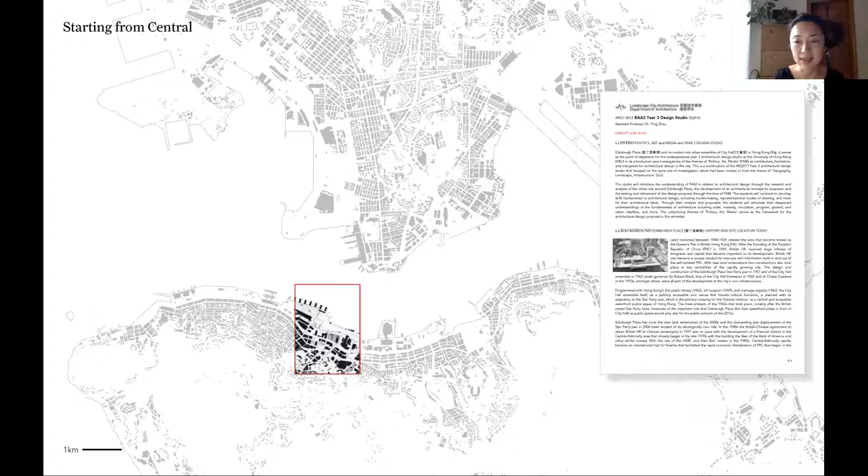What I share today began as a series of architectural design studios at Hong Kong U since 2017. We began by looking at the City Hall as an ensemble—starting by taking apart and looking very closely at this place we all know well. This is, of course, what we have the luxury to do in the academy.

In analyzing the history of each of these buildings, we see that the rising skyline very much manifests the history of Hong Kong itself. The changing materialities of the facades, from the masonry structures to the taut glass towers that rise, reveal the economic transitions that have taken place in our city.

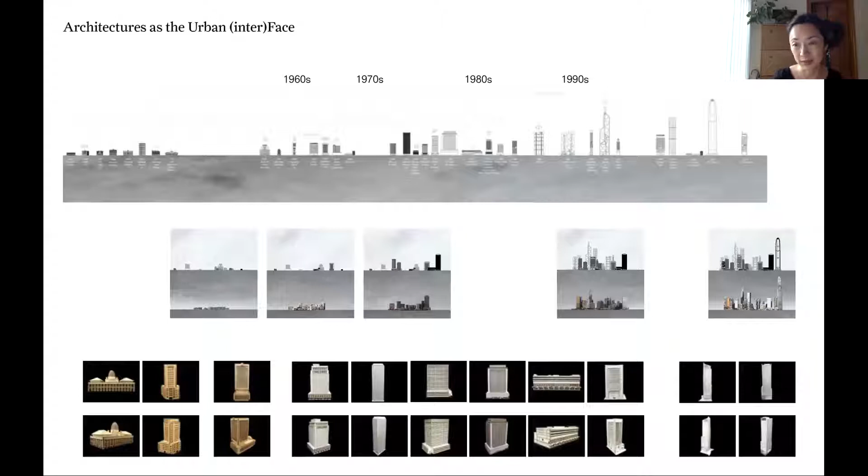They tell the story of the old trade houses and the new global capital that makes this place what it is. What also makes this place special is that it's located along Victoria Harbour, giving it an urban face that is extremely clearly visible—something that makes it quite different from other cities that don't have the luxury of such a harbor.

We can see from the plan that all of this was carefully composed and deliberate. There's an axis leading from the HSBC tower aligned to the Star Ferry—I don't know if you can see my mouse—and there are other alignments designed within this ensemble, for example the alignment to the cenotaph from the City Hall, and the public spaces.

The Edinburgh Place—this was the former Queen's Pier, and this was the old Star Ferry terminal. This is the parking garage that still stands there, and the GPO that faces the waterfront. A lot of these boats actually landed right under the basement of the GPO, delivering the mail that makes all of Central buzz still today.

These public spaces, of course, have been changing, but the public spaces are actually even more highlighted by the functions that take place within them.

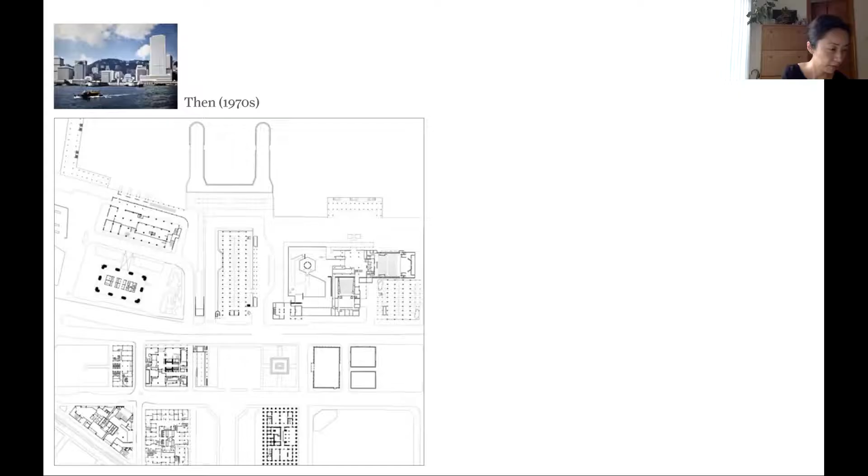We can see here the library, the concert halls, the museum, the ferry pier, the post office—these public functions, including schools and railways, all came at the same moment in history during the industrial age under modernity. Our predecessors at that moment thought these civic functions and the spaces that went along with them not only make us better citizens and a better society, but were also possible because we all live together in the city. Here you can see again the very urban and civic face of Hong Kong from Victoria Harbour.

We know that this face would very quickly change around the mid-2000s with the land reclamations that you can see took place in the lower right of this image.

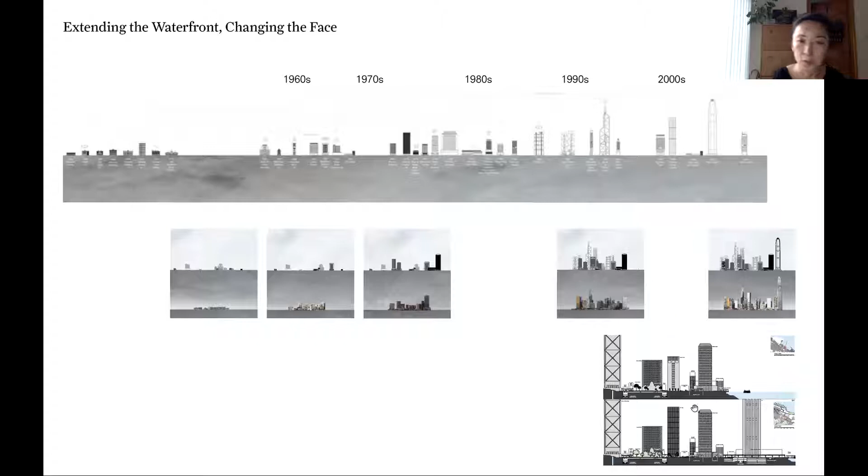The decision to ensure Hong Kong's economic success had already been made in the 1990s as a result of many things. Infrastructure was, and is, always seen as strategic to development and therefore a priority. We know, for example, with West Kowloon, that the conceptions for the landfilled hectares—all the blue infills—only took place after Kowloon Station itself opened in the heart of West Kowloon.

Similarly, when we come back to our city center, Central, the highways are again prioritized. The consequences result not only in the dismantling of the civic face we just looked at, but in the indeliberateness of the resultant spaces, grouped around roads rather than plazas. You can see as architects the shift that took place between here and here on the right—the plazas are no longer designed as plazas, but are left over from the roads created around them.

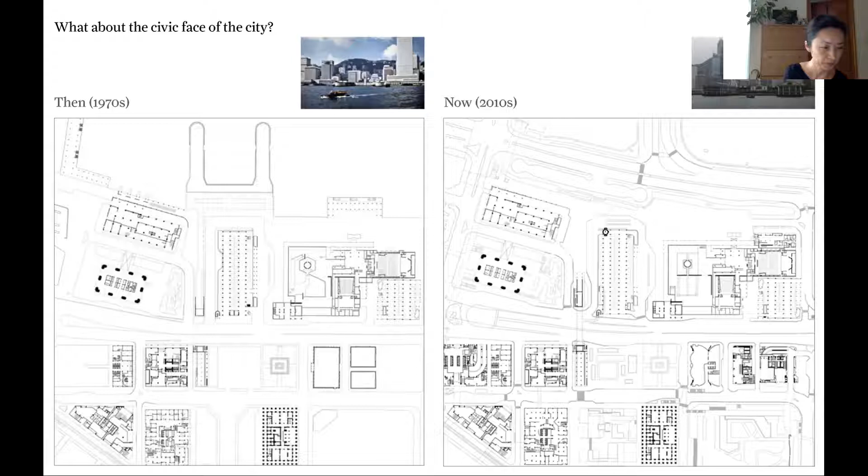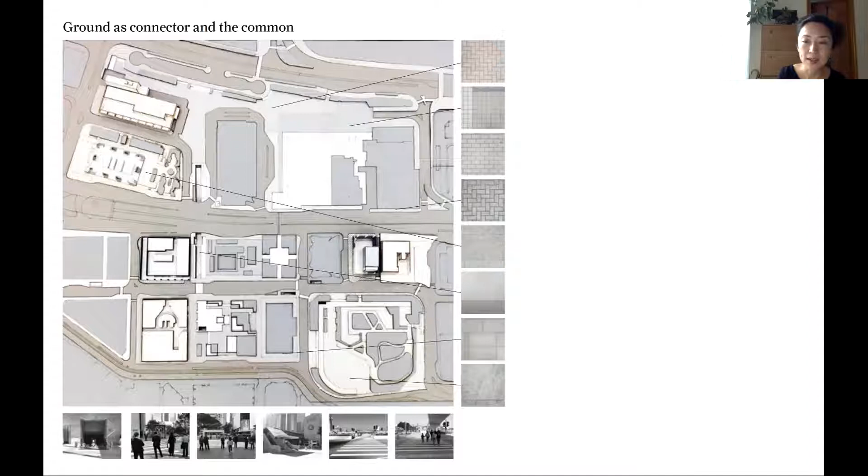It was also important to look at the study of the ground, because ground is not only for cars, but for people. Cars, romanticized since the post-war era of the 1950s, have since been regarded as mistakes scarring the city, already in the West. This shows us that Connaught Road, which separates City Hall to the north and Statue Square to the south, is also a very large rupture and disconnect.

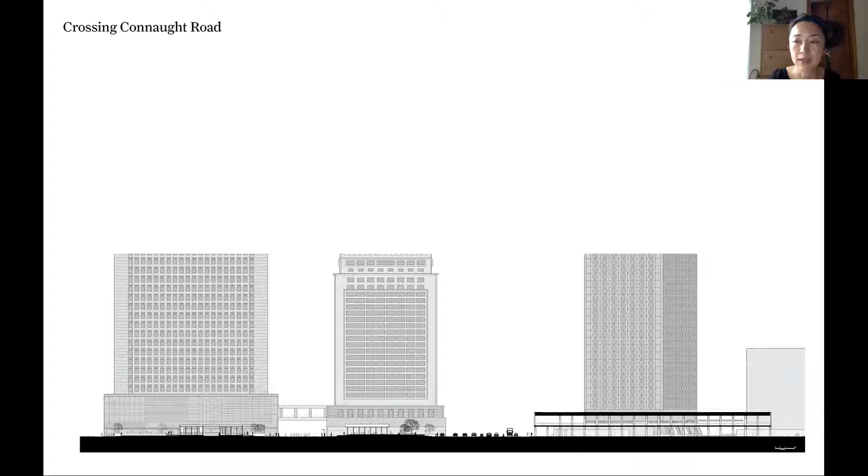So in order to cross Connaught Road from Statue Square, which is up here, to Star Ferry, you can see there was a tunnel already planned there. This is, of course, a larger set of relationships very visible in Central, in relation to the extensive MTR tunnel system that was also put in place in the early 80s.

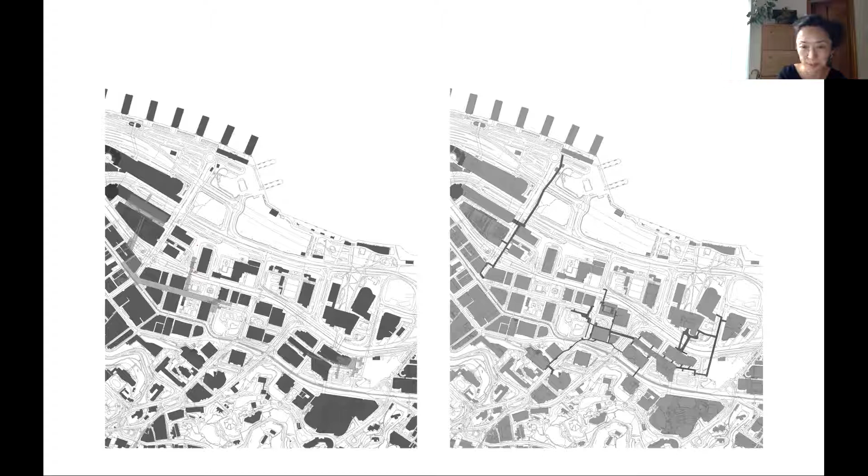Another glimpse—to go to the City Gallery, on the side of City Hall from the eastern end, instead of taking the tunnel, you can also take this bridge that used to go through Hutchison House, which is this building here. But of course, Hutchison House, which was standing only two years ago, is no longer with us either.

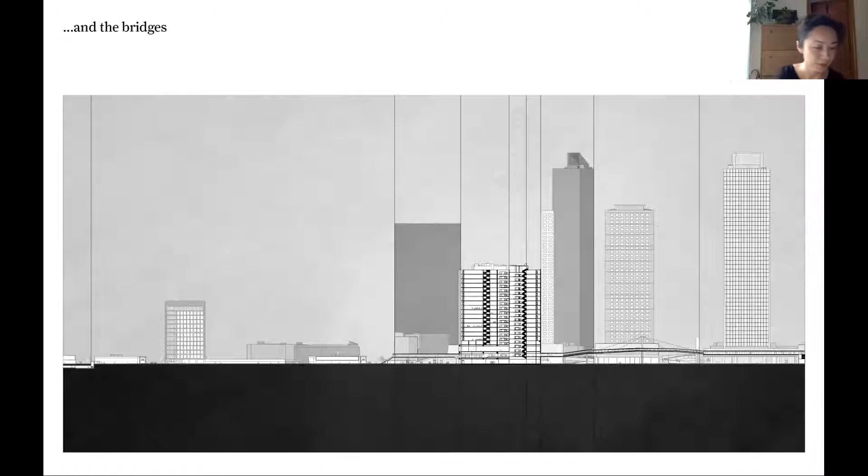Another very real view: these transit spaces are actually, on weekends, also places for rest and gatherings in a city where space is of course very scarce. These places that are public, that are shared, that are in a way commons, are in addition to the more formally designed plazas and parks that already take place.

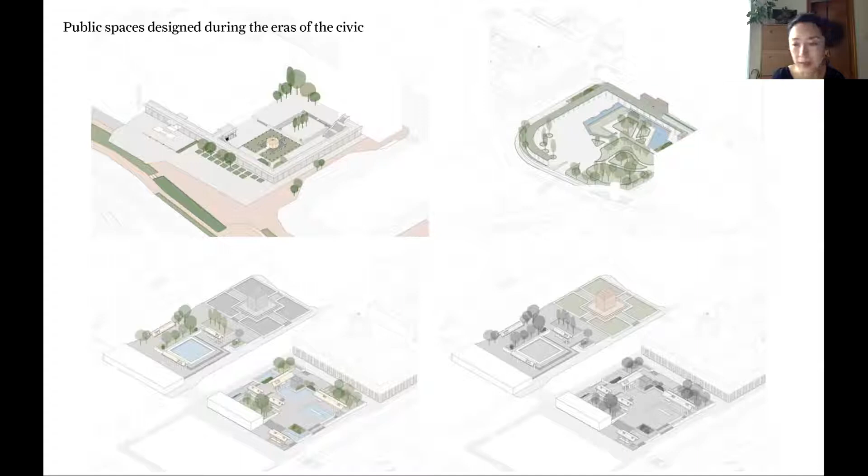So we have the set of present conditions we are in today. It is itself very much in an interim state. And with the students, we were asking: what are the plans for this byproduct of infrastructural priorities? What is the future?

We began to look at the future and at the guidelines for designing this future. It was, for example, very obvious that the importance of parking compels or necessitates the demolition of the GPO. You can see a student's analysis of what would come if it were to be realized, and why it's much easier to just tear down buildings in order to make this happen.

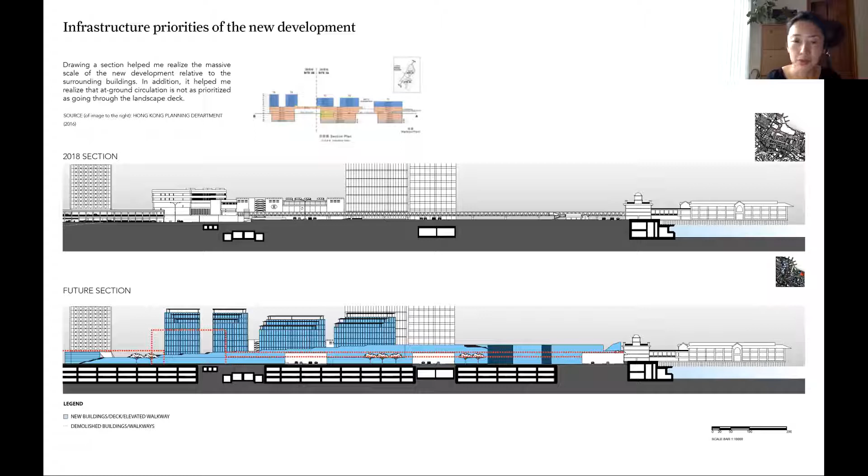What kind of urban face? Of course, we're really talking about the face of Hong Kong, what the future shows to the world. The future urban face would be designed in consideration of the forms, massing, materialities, and the functions of this place.

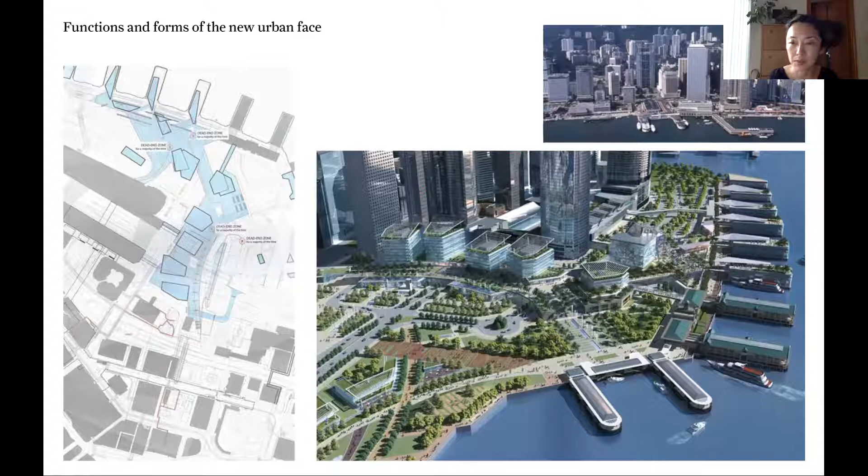We saw earlier that capital manifests itself in the taut, shiny facades that take place. So is this what kind of face we would like to present to the world? We have, at least in the academy, the luxury of dreaming a bit of other possible futures, to think that this is not the only possible future that needs to take place here.

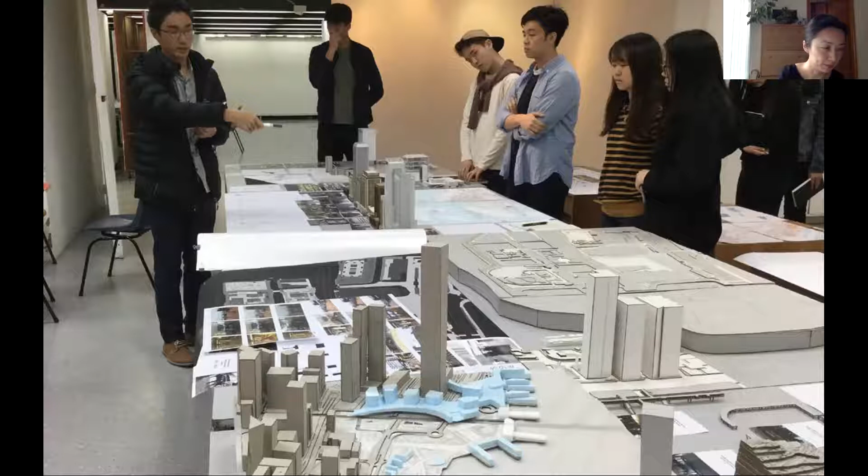We tried very much in the two studios, looking closely at the site to break down their elements. It was interesting when we were discussing and making models at various scales that one of the students took this blue foam, which represented one version of the future according to the planning guidelines, and said, did they not make a model of this? Did they not look at this? Because if you looked at this huge blue foam mass and put it on the existing structures, we'll see how massive it is.

We know there's an adage from a lot of planning departments, especially from the developing part of the world, that bigger is better. But that question should be tabled again in relation to the future of this place.

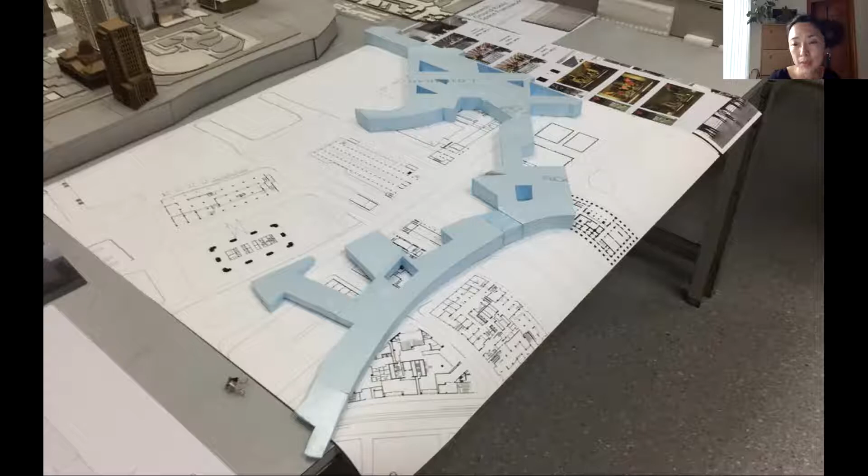The other thing we can see is that the intent for this blue massing is, of course, for a lot of commercial programs rather than public programs. So you can see from this outsized scale, it is much larger than, for example, the existing City Hall, not to mention the GPO itself.

So the urban face of Hong Kong, the City Hall building and the GPO, is an ensemble, the realities of the infrastructure and developmental priorities, and within all of this, is the civic still possible here?

If you had visited our exhibition in 2018 summer at the PMQ open space, you would have seen that some of the students did design with much care and precision alternative futures. And within this, a version of reuse adaptation of the GPO was there amongst the other ideas. So I hope some of those students can also keep on going and contribute to this open call. That would be really wonderful.

So I end on a few words that I think is very important in thinking about this place, this notion of a public. Public, and not in the sense that the land is owned by the state and done with it with certain kinds of decision making, but the sense that there is something that is shared by all of us, this notion, this common, in relation to society, especially in thinking the possible functions that could come into this new future.

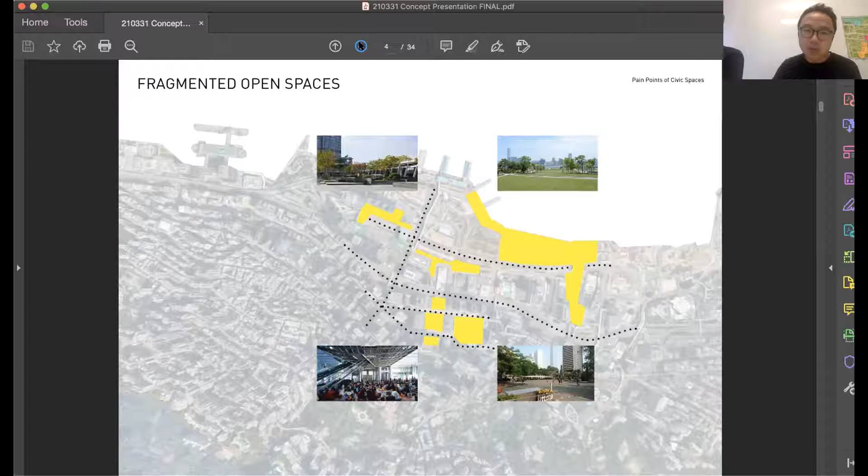And then the other is what is civic program, and what has happened to civic programs. And I think what Ying was also echoing, there was a public phase back in the 1960s when City Hall was built, and there was a very deliberate intent of having that at a very prominent space in the city.

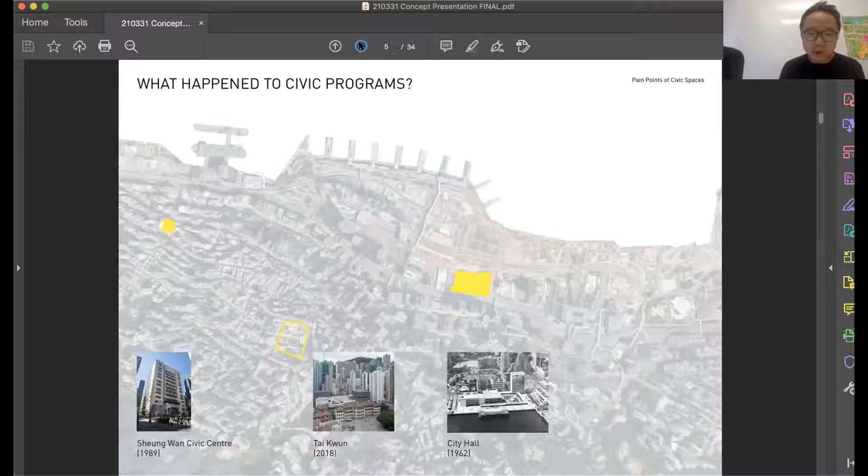What we've observed down the road is there's the Sheung Wan Civic Centre, which is a very typical kind of vertical building. Then obviously we have what Katie was mentioning, a trio of Tai Kwun and Central Market and PMQ in succession. And I think those are really encouraging, but there's still a larger question of what is civic programs and what is civic space for Central.

And obviously, right now around the site, it's quite undefined. There's lots of public space, but it's like question mark, question mark, question mark. How do you get to it? What is going on there? What's happening around there? A lot of undefined spaces.

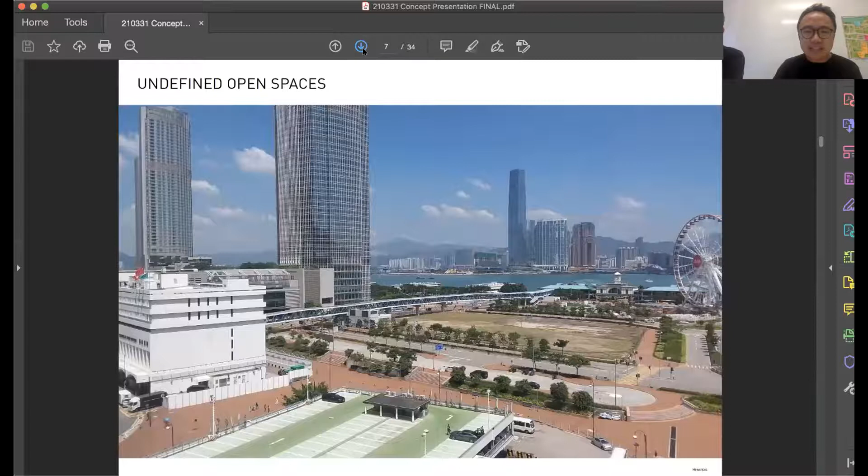So, typical to a lot of our projects, what we look at is there's a couple of issues that we identify: fragmented open spaces, lack of civic programs, informal activities, and undefined open spaces. But these are also all opportunities that we can base our design on.

How do we facilitate integration of open spaces for different types of activities? How can we consult different stakeholders, bring them into the fold to look at what civic programming needs are? Can we build support spaces for some of these informal activities? Can we transform some of these open spaces and streetscapes into something that is for the many?

And then, how do we provide open spaces with varieties of spatial definitions, so we can create that civic face, that civic presence, that we think is still lacking in the neighborhood of Central, a very important neighborhood.

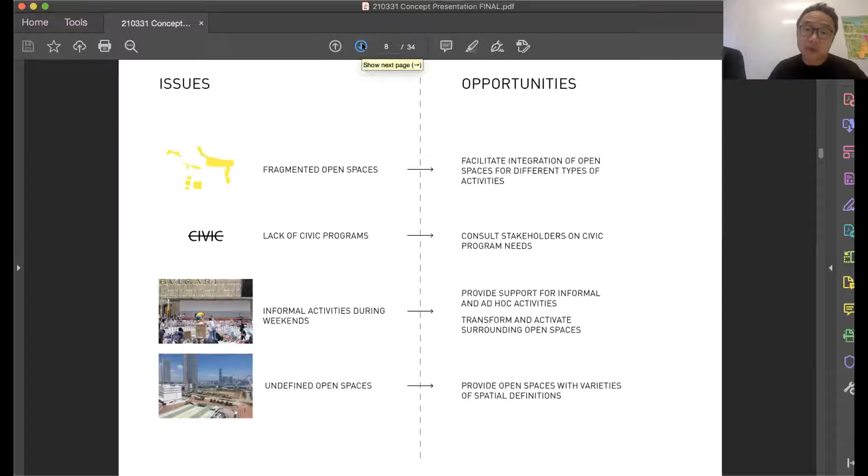So how might we encourage informal uses and cultivate a diversity of civic programming with visibility and easy accessibility? There's a lot of public spaces in Hong Kong that are very inaccessible, for example on top of podiums where there's no elevator to access. How do we create a melting pot of new civic spaces that can allow citizens of different needs and abilities to create, meet, mingle, and play?

How can we establish an identity for public space that respects culture and heritage, and also, most importantly, continues reappropriation according to the needs of community? How can a space be flexible and available to accommodate these needs?

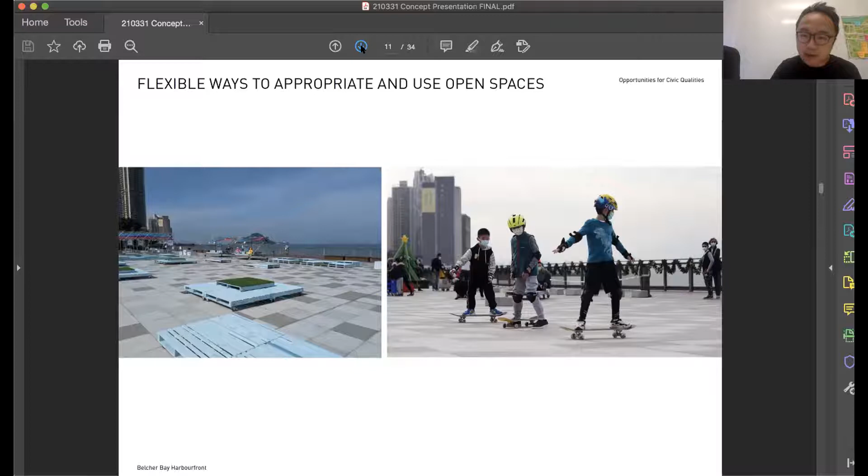This is an example of Belcher Bay Harbourfront, where there's a very experimental approach of creating extremely flexible and experimental play with different kinds of audience. Obviously Tuen Mun Park, which is quoted so many times around inclusive play. But also, how do we bring in technology and different kinds of interaction into the fold?

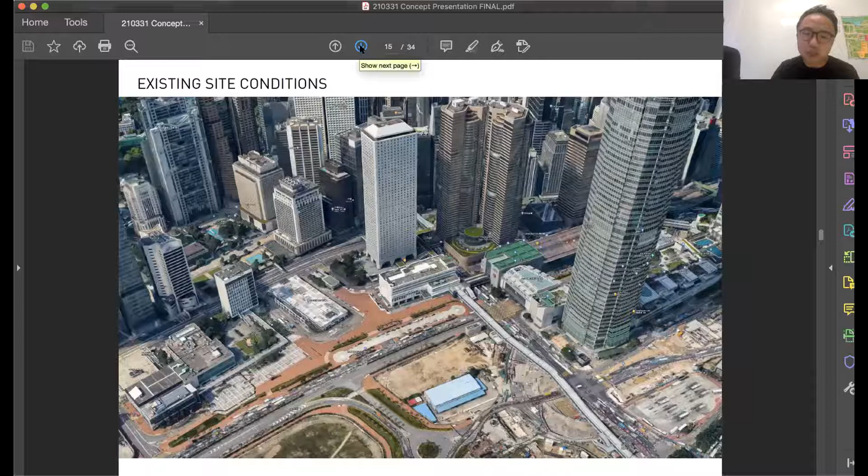So with our planning strategy, we know the site is challenging on many fronts, with a lot of different roadways and a lot of activities that need to happen on the first floor instead of the ground floor. So the plane condition needs to be very well defined. How do we actually connect while the site is quite disconnected?

So our initial strategy has six parts. One is, echoing the planning principles, to strengthen the access to the waterfront. We want to push this massing to one side to really create room for the civic landscape.

And then responding to the heritage component, how do we use the back of the site to address GPO, City Hall, and that whole complex at the back? How do we create leisure for the public, and how do we create such a unique site that creates a viewing experience and an amenity for the public in the front?

Obviously the adaptive reuse of the heritage, really looking at GPO as a very integral component. The Star Ferry clock tower, which I assume they will bring back somehow - how do we respect that? And obviously the extension of the waterfront.

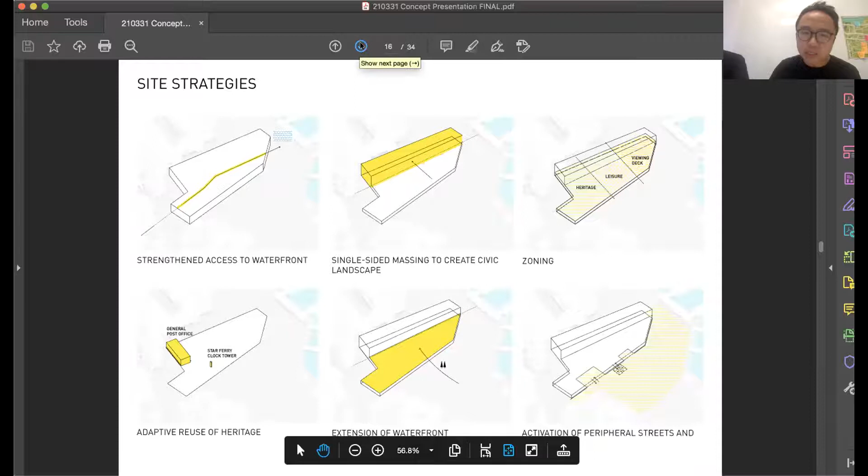How do we create a plane that can really interact and relate to the waterfront? And lastly, how do we look at the periphery? How do we activate the streetscapes on the edge to allow for these informal civic ways of activating the public space to happen?

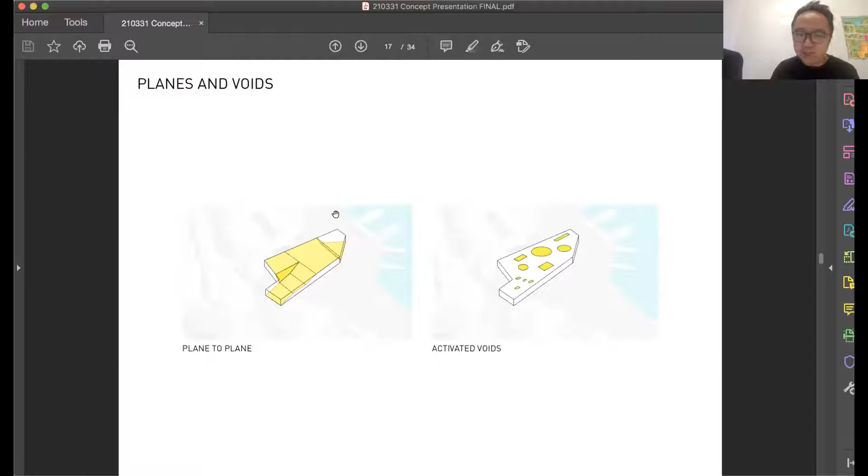So we have two strategies. One is kind of a plane idea, and one is kind of a void idea. And Rick is going to walk you through that.

Right, so we have prepared two ideas as of now. The first idea is what we call Slope Commons. What we envision here is actually a series of wedges - large urban forms that aim to bring people from multiple levels, namely from the south side, from the basement, the connection with the MTR, up to the podium level, and further up to the higher massing towards the west side, closer to IFC.

Hong Kong's development a lot of times falls victim to development pressure, and it's never fully realized to the architectural potential that it could have.

In here, we are interested in exploring the idea of a larger urban form. The wedges sort of underline the entire development of Central, creating a continuity that is immediately iconic. It creates an unmistakable landmark at this very precious Site 3 of Central.

The other idea that is very important to us is that the Site 3 development is not entirely contained within the boundary. It exerts its influences across to the lots on the north, and also to the east side as well.

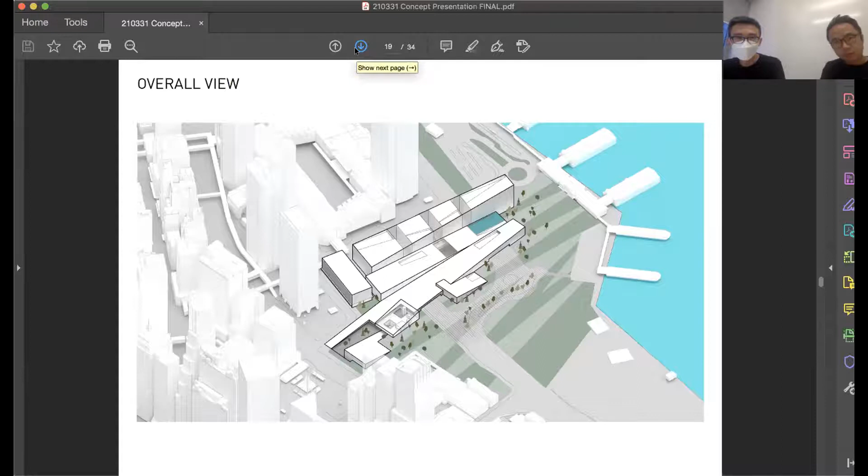Here you can see how we envision the programming of these wedges. Like what Eric mentioned before, we think the massing closer to the south side has a better relationship with City Gallery and the GPO, so the programming there will probably be more civic oriented.

With this particular scheme, the slopes on top of these wedges are all meant to be accessible. This opens up a lot more opportunities for urban experiences that have a very good relationship with the harbour views.

We never forget about the symbiotic relationship between commerce and civic. Going forward, we understand the importance of how the two will be driving circulation for each other, and the success of one is really reliant on the success of the other.

I'm not going to go too detailed into the circulation. I think we are all pretty familiar with the site and site forces.

This is what we meant by the zoning of civic program. Closer to the City Gallery and GPO will be the cultural and heritage program. In the middle, the leisure zone will also include the main chunk of the commercial zone, so by definition it is a bit more inward looking, supporting play and leisure functions. Finally, closer to the waterfront, it is the more outward looking viewing deck functions.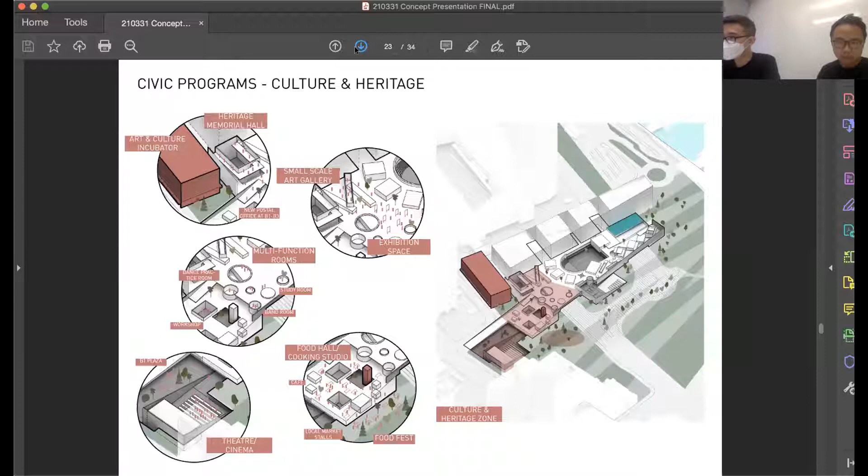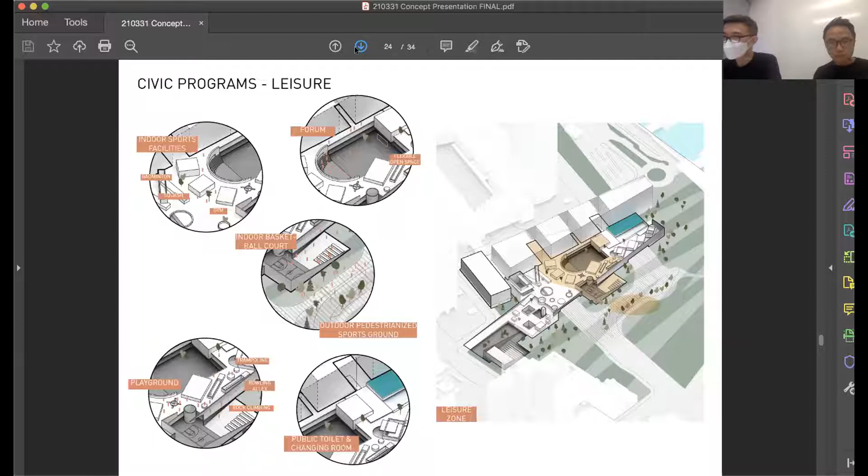So like I said, the leisure zone has different activities. Here we are suggesting play and sports, and it complements the commercial activities that are, again by definition, more inward looking in the middle of the plot.

On the waterfront side, we are kind of obsessed with this idea of the infinity pool facing the piers. At the same time, we wanted this portion to open up towards the pier, like what we've shown at the bottom here—the pier plaza—which could inform the experience of the ferry piers crossing Victoria Harbour.

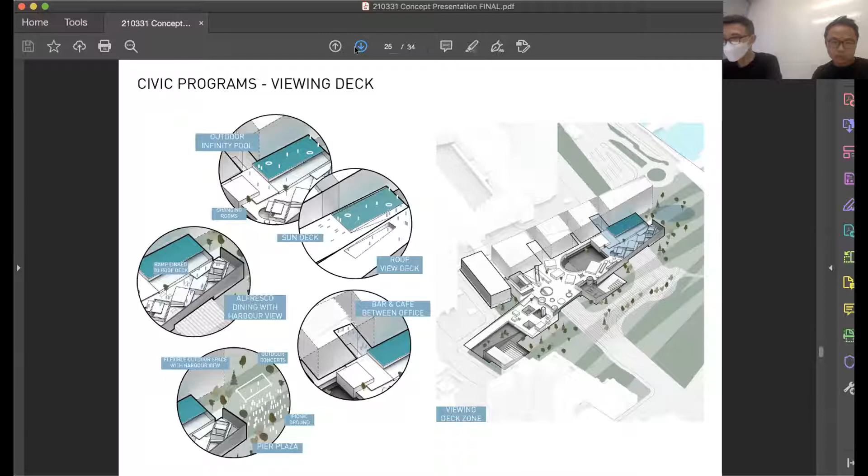So that was the slope common scheme, and our second scheme has to do with the idea of yards. Here we are creating a second scheme that is less formal, but one that is more responsive to the civic open spaces required on the site.

For example, here you'll see there are a number of spaces—one that is closer and more complementary to City Hall. There's an open space supporting the clock tower, and an open space immediately to the north of GPO.

There's a capsule-shaped open plaza suggesting a connection with the eastern lot next to Site 3, and also a figure ground relationship with the pier plaza, informed by the northwest, northeast facing open steps that perhaps would be informed by outdoor performances, etc.

So the figure ground relationship of all these open spaces informs the architectural statement of the scheme. For example, the formal language is more akin to the modernist towards the south near the City Hall, and becomes a bit more organic as we move towards the amenities and civic programs on the north side.

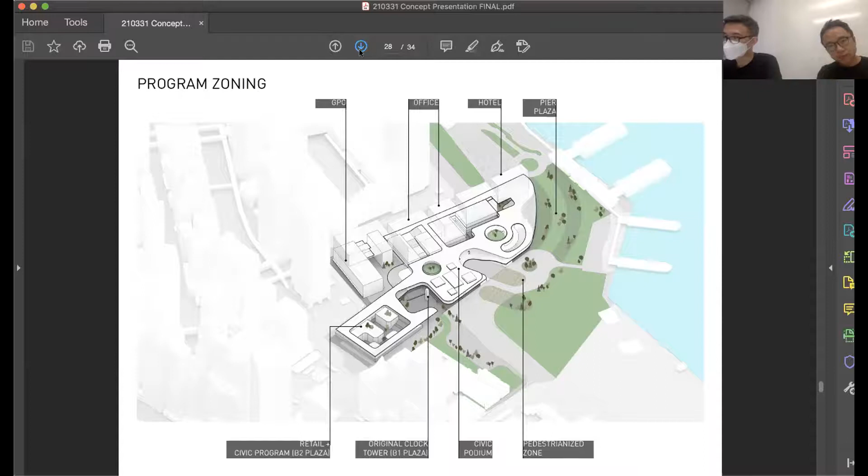Similarly to what I said before, the figure ground relationship informs how these open spaces are mixed with the commercial program. The plazas also infiltrate into the commerce and office towers towards the west side, closer to IFC, and these are important connections. The different sight lines and connections are also fulfilled clearly in this scheme.

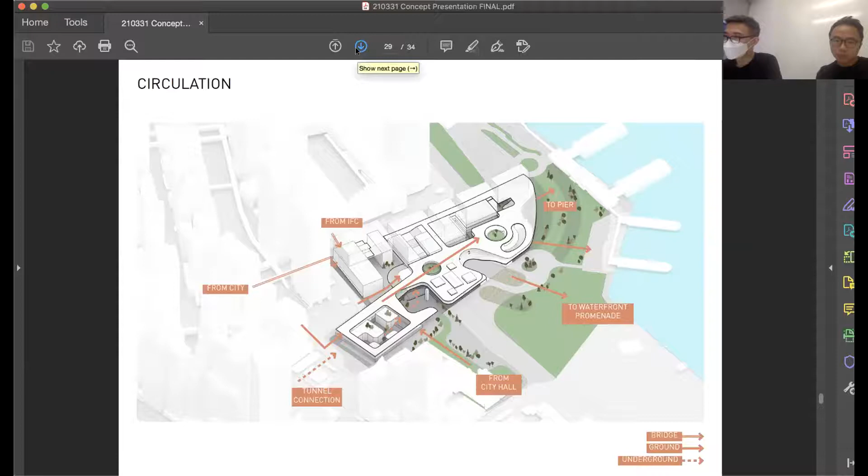Similar zoning like we have shown before. On this scheme, the civic programs are complemented by two large plazas. Again we have exhibition programs, courtyards, galleries and studios and exhibition spaces, and incubation program inside the GPO is what we're suggesting for the scheme here.

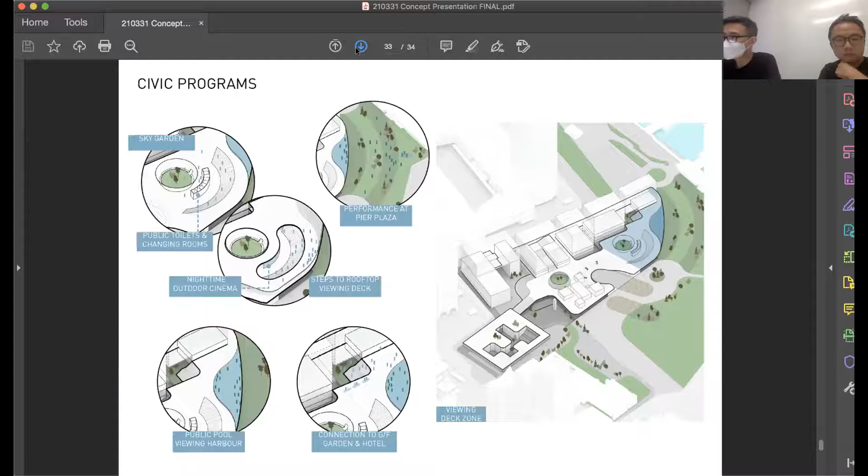Leisure programs again inform the middle part of development, and one important idea is the commerce - for example, alfresco dining happening here on the rooftop. The north part is opening up towards the open spaces on the north side and also towards the piers.

So that is the end of our two schemes - one that is a little bit more formally driven, and the second one that is more responsive to the civic programs we're envisioning along this swath of very impressive and important development coming to Hong Kong. Thank you very much.

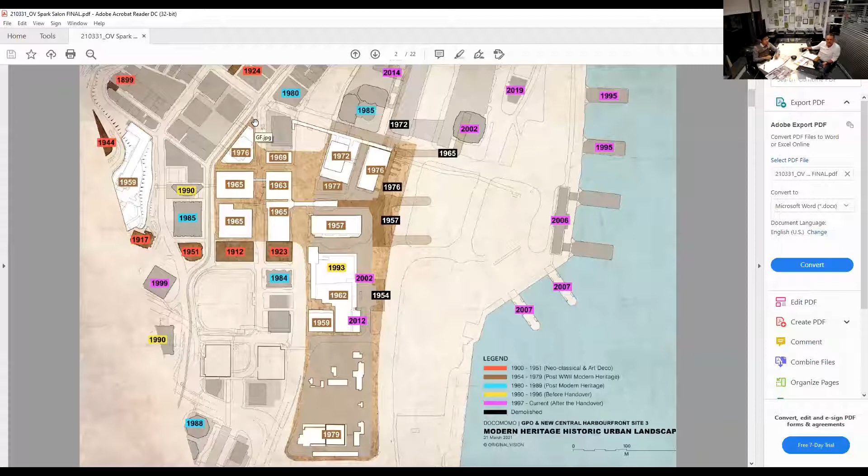Within this historical images, you can see that the first connectivity we want to celebrate is the heritage or historical character embodied inside Edinburgh Place, and also the extension from Statue Square to the waterfront areas. In the top left, you can see that back pier that was already lost in 2000 during the reclamation time.

That also includes the City Hall roof promenade, one of the features that once was a highlight inside Edinburgh Place and the waterfront pier.

The second important character is the elevated walkway coming through the landmark, starting from the Mandarin Oriental Hotel - that is the first one in Hong Kong. The other is it was previously a ceremonial place, including where the Queen's Pier City Hall celebrated the British government inauguration and the arrival of the Queen. Also including the war memorial inside Statue Square and City Hall.

In the second part, we will want to tell you the physical connectivity from the underground, upper ground, and so on. I will hand it back to Andrew.

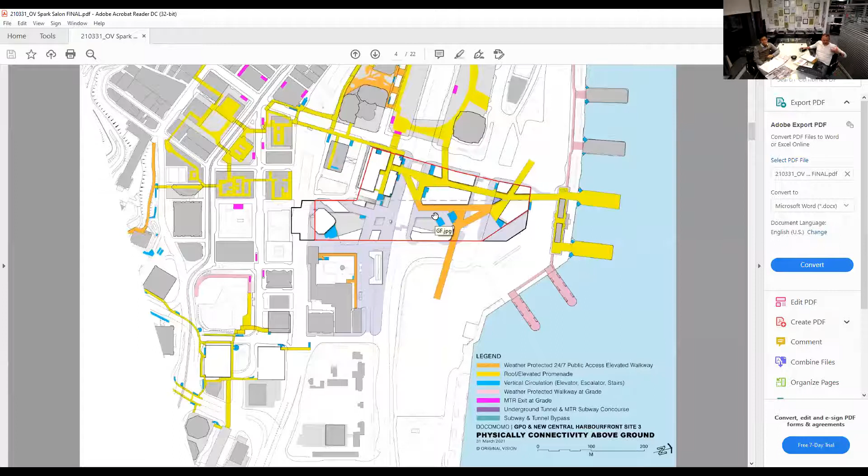So what we're trying to do is create a network, a multi-layered network within the site itself, to try and make more connection between the underground, the double underground, the at-ground, and the above-ground facilities that we have available to us.

So what we have here is the connectivity with the second basement MTR connection. We're bringing the two Central Station locations together and focusing it in on this site, creating a ring around which pedestrians can roam underground, which will generate far more footfall for all of the retail that is underground.

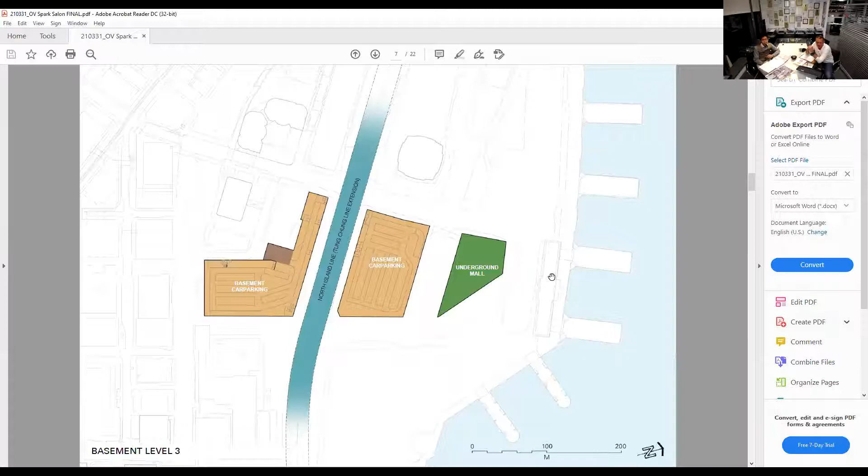Am I missing something here? Oh, okay, plans proposal. All right, go down to the very basement. The North Island line runs through the site. Either side of that, we're proposing two level 3 basement car parking areas, and an underground mall on the other part of the site that we have available.

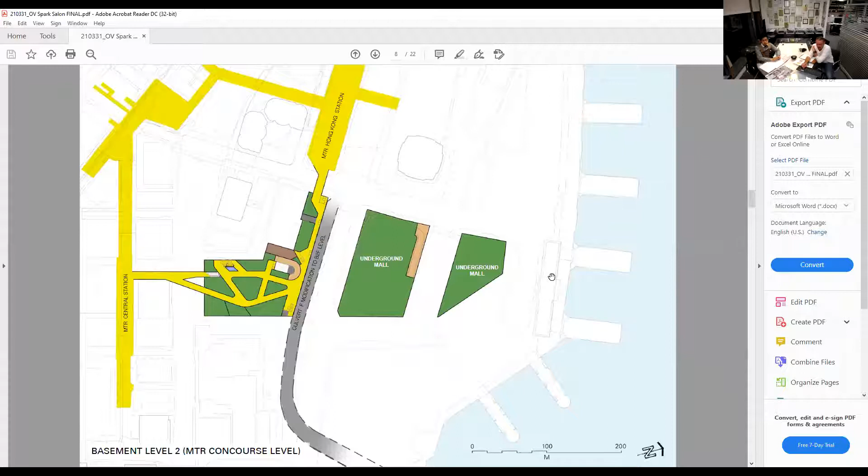Coming up, this is at basement 2. This is where we connect through with the MTR, Central Station, Hong Kong Station, and create that ring loop around. This is 2 floors underground, so this is very much a special case, but our mall, the green, goes down into that space.

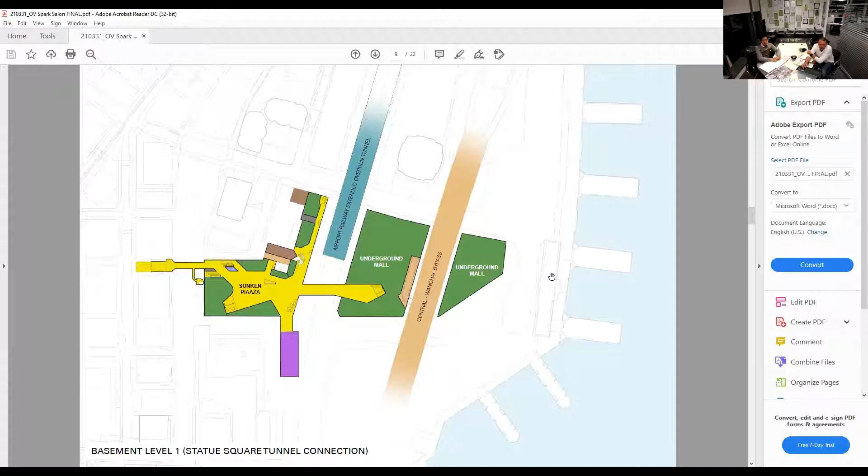Coming up to basement 1, this is where we connect through to Statue Square with the existing tunnel that brings us up into a sunken plaza, which carries on through another tunnel to an underground mall on the other side, then comes up another level to the upper level, ground floor level. So we've got 2 sunken pits, as it were, which are sunken mall, left open to the sky.

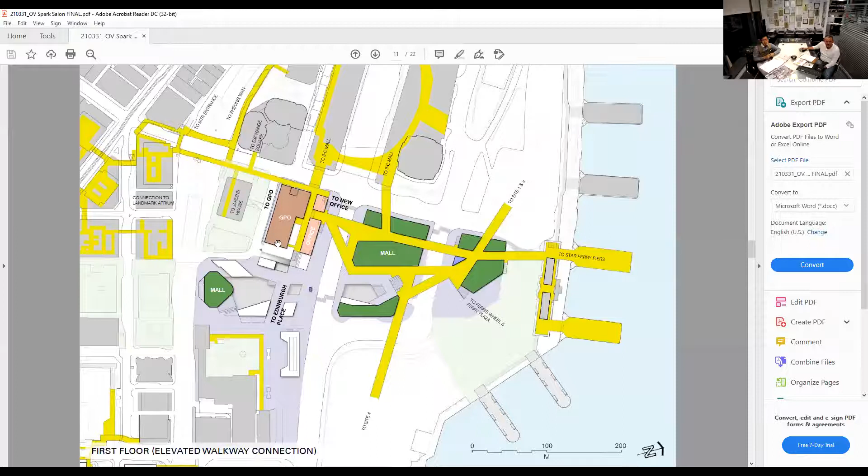So as you can see, what we're trying to do is make these connections very tangible and very strong. We've made the main one from Star Ferry back up into Central, coming through and passing by the GPO. Above the GPO, above the first floor level, we're taking it up another level here.

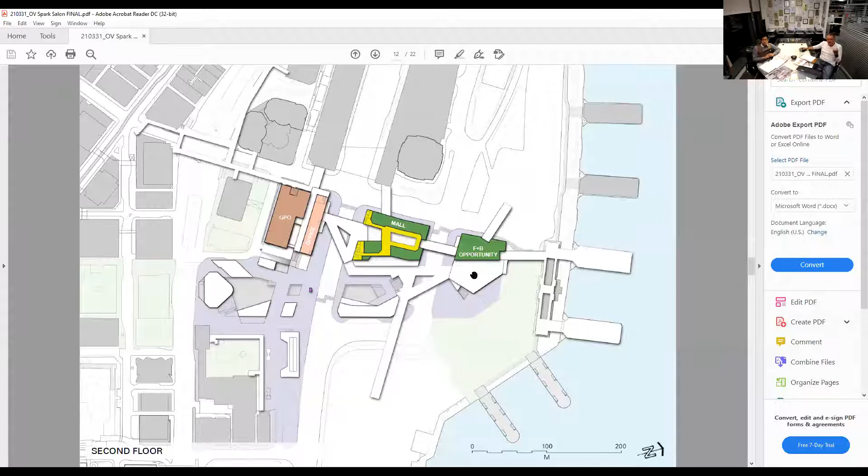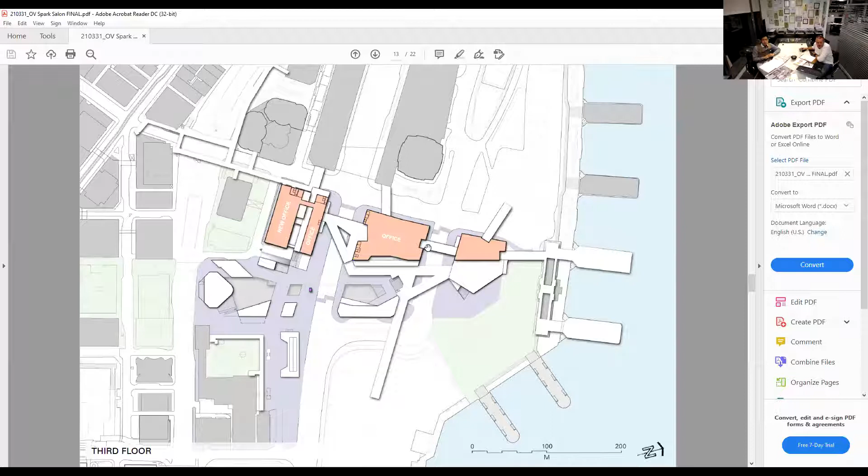It was interesting what Eric and Rick were talking about, using podium spaces as public spaces, and that's what we're looking at doing here, using these rooftops, which don't have separate vertical circulation access, as public spaces, much the same as the public space on the upper floor and the podium level of IFC has been used. Then on the upper level, we're essentially changing the usage to office space, taking us all the way up to the top floor.

In terms of massing, I notice I've only got a couple of minutes left.

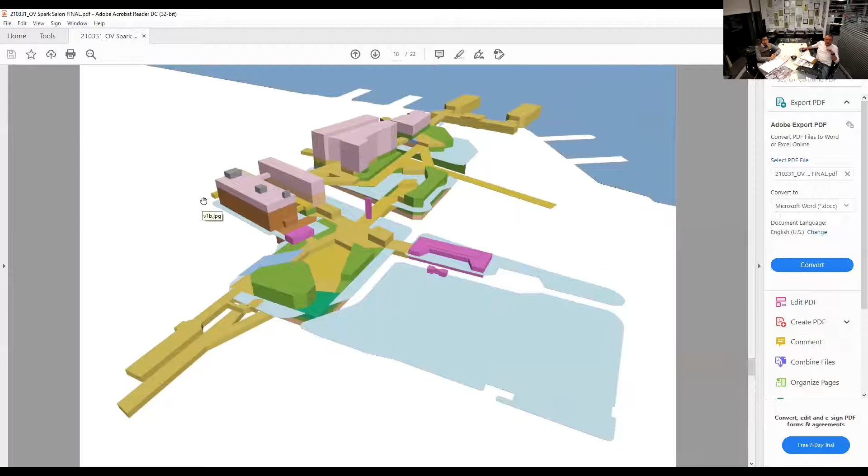This is looking back from essentially the Hong Kong Bank, looking down through, and as you can see, it becomes very much a network of connectivity. We have reintroduced some heritage sites.

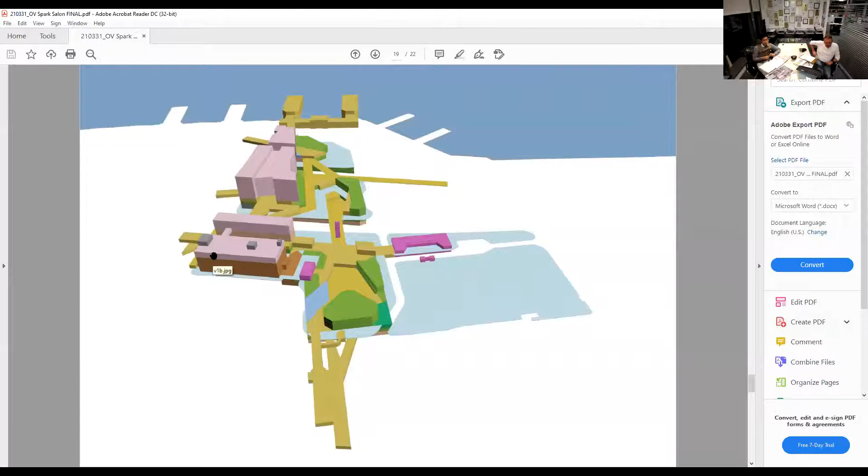We've got the Star Ferry, the Queen's Pier in this location. We have the clock tower - interesting to see that Rick and Eric had it in probably the same location. And then we've got the GPO on this side here. The GPO has been repurposed with the post office on the ground floor, 4 floors, and then we've got 2 floors of office space in the existing fabric of the building above the GPO.

So if we look from the ocean or from the harbour, we've got the ferry piers, and that network almost like a spider's web of connectivity back through into Central, but also into all of the exciting sites happening on either side, with IFC on the right, sites 1 and 2 here, and site 4 here.

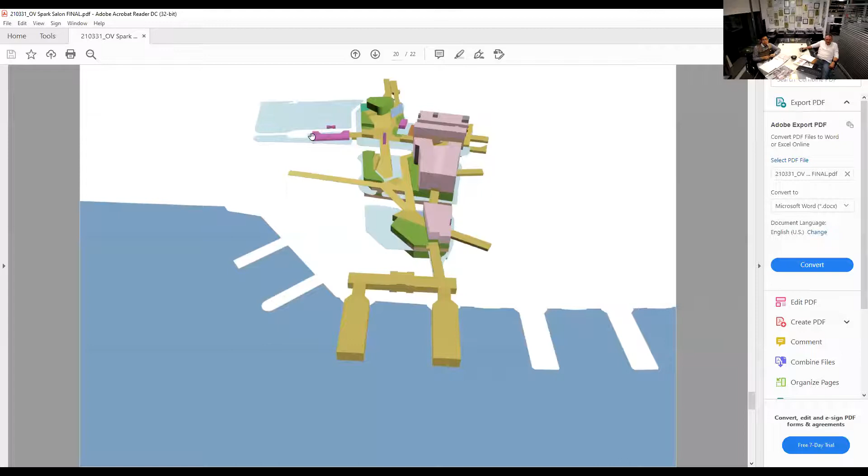And finally, a view more from the west shows how, similarly to Rick and Eric, we've got our massing, which has essentially been forced by the planning requirements on the west side, and then the view corridor from Hong Kong Bank on the east side creates a fairly exciting connectivity opportunity linked together with retail.

So, as I mentioned about the planning, we've got quite a lot of diagrammatic planning information available which we can share with all the participants, so they don't have to look into things in so much detail. We've tried to condense and distill them down into more usable and legible guidance diagrams, and we'll be very happy to share them with all the participants.

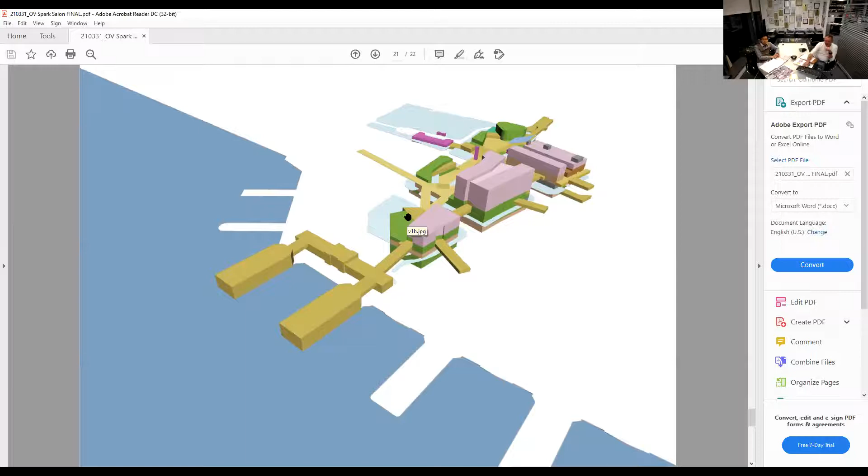So that really brings us to the end of the presentation. Thank you very much for the time and your attention, and apologies for running over by 1.5 minutes. Thank you very much.

And then I think we have our final presentation from the architects.

Hello everyone, my name is Charles, and I'm from AONA Architects. I myself am an architect and a researcher in architectural history of Hong Kong.

Before I start, one thing I think I should take the liberty to remind the panelists and the audience is that the way the three teams work together is not so much like an architectural competition. I know it may sound like we are competing against each other, but in fact we set off very early on knowing it is first of all not an architectural competition, and secondly, we try to focus within our own areas of expertise, or start the project from our own area of expertise. That is the reason why you'll see the three teams take slightly different approaches.

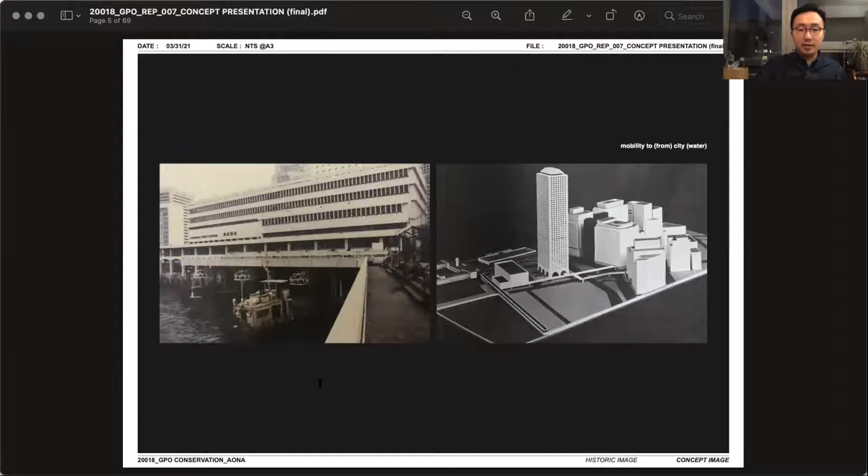These are some old images that we have dug up from the archives. The one on the right is quite interesting because that is actually the original plan for the GPO. The GPO was never designed to be a 6 or 7 story building like the one we have today. In the original proposal, it was supposed to be a 20-story high government office with a huge podium that houses the concourse for the staff area as well. But it was due to

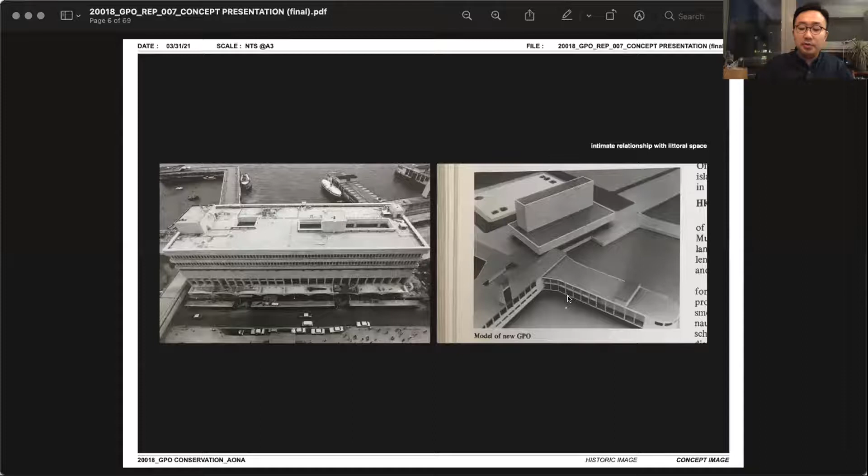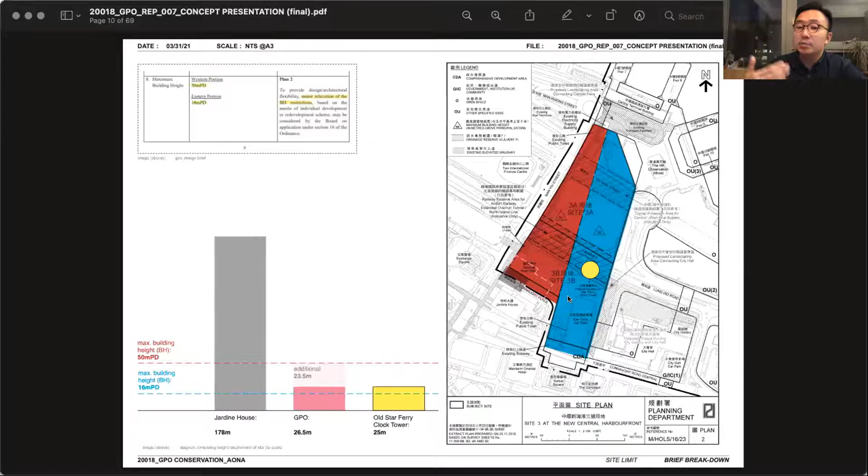So the first thing we were trying to look at, as I said, is the floor areas. What are the floor areas set off in the site tender? How much floor area do they expect the developer to provide, and to see whether or not it's really necessary to demolish the GPO, or whether it's possible to just convert the interiors of the GPO into other uses. Maybe next to that we can build some more additional GFA.

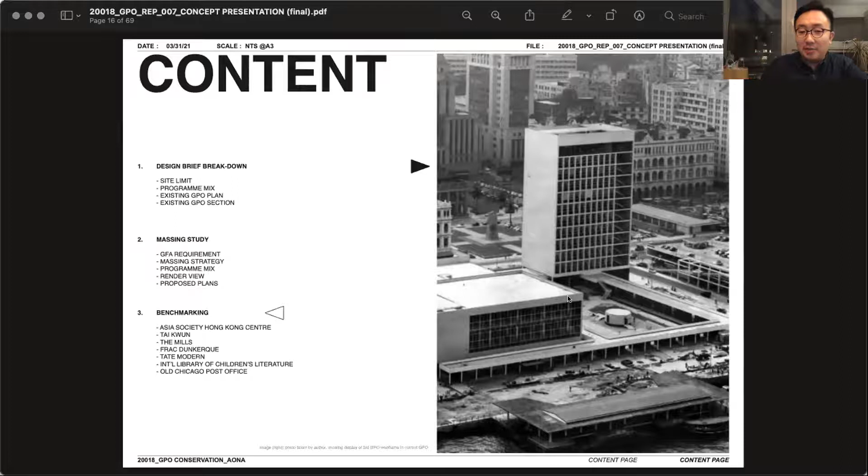I might jump ahead a little bit, sorry. I'll talk about the outcome of that research a bit later. But before we do that, we try to look at the building mass of the GPO. It's actually quite a huge building.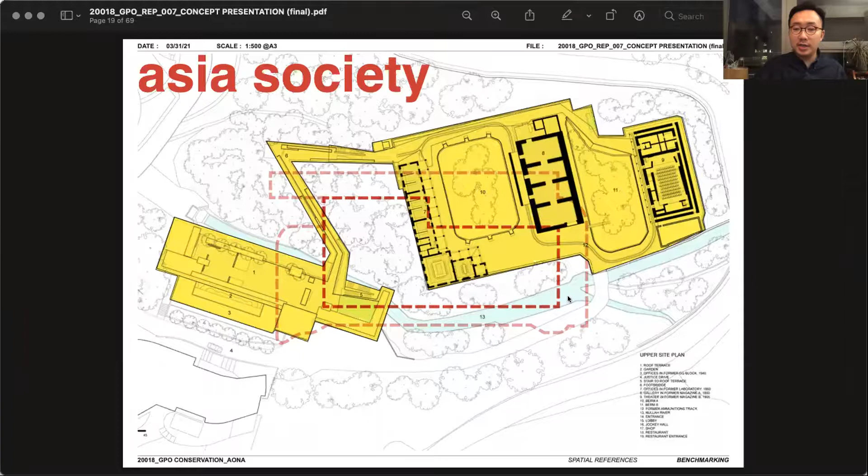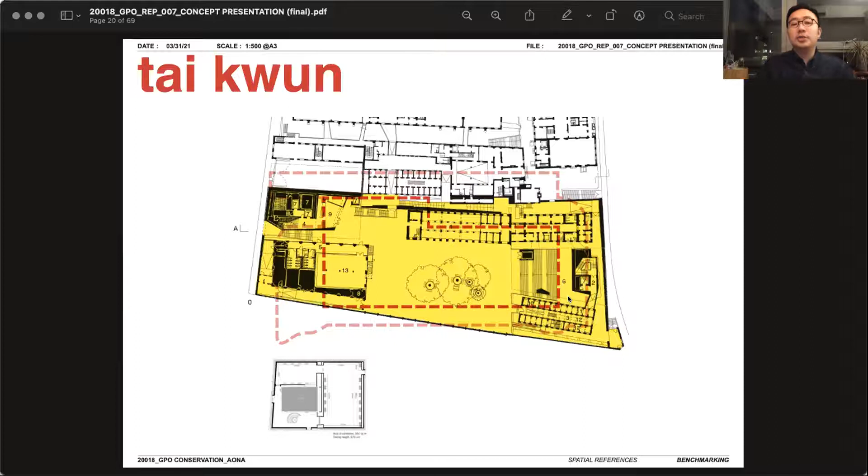It's almost comparable to the whole compound of the Asia Society. In fact, it is almost as big as the compound of Tai Kwun. So when we go to Tai Kwun, we'll see that it has a huge courtyard surrounded by all these beautiful historical buildings. The floor area of the GPO is actually similar to that. This is in comparison to the Mills, and some other examples overseas as well. So this is the result of the research.

A small, very quick calculation we took in terms of the GFA. The result is that it of course depends on how much GFA is there outside of the GPO itself. But technically, when we give it a more reasonable guess, it seems that we only need to add a little bit of GFA to the existing GPO in order to fulfill the requirement, or the allowable GFA in the site frame.

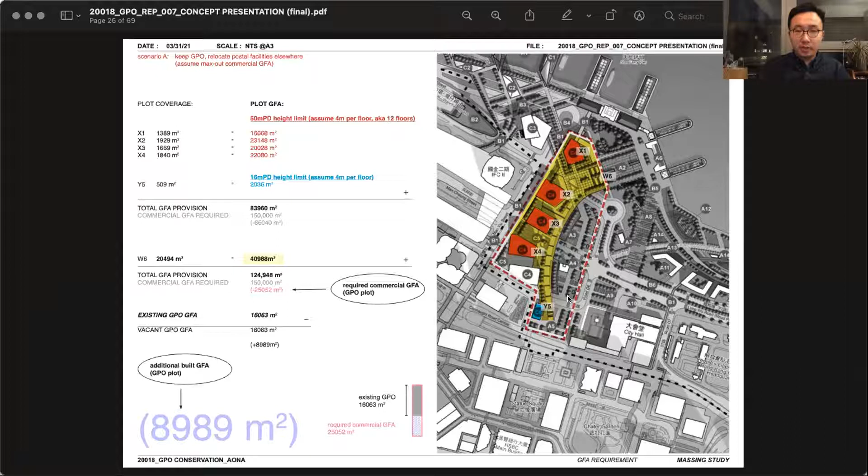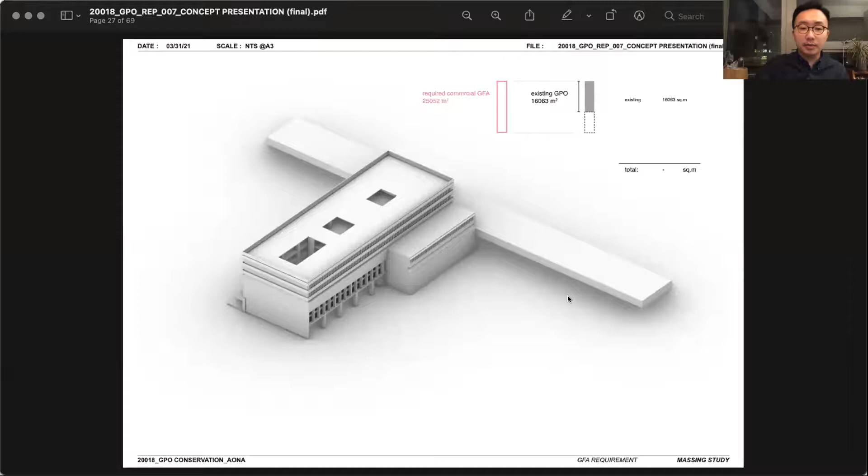So based on that, we try to come up with an architectural solution, to look at the architectural possibility of, first of all, keeping the GPO and then adding some masses around or next to the GPO. So in essence, this is the amount of floor area that we will need to add to the existing GPO. This is not our proposal, don't worry.

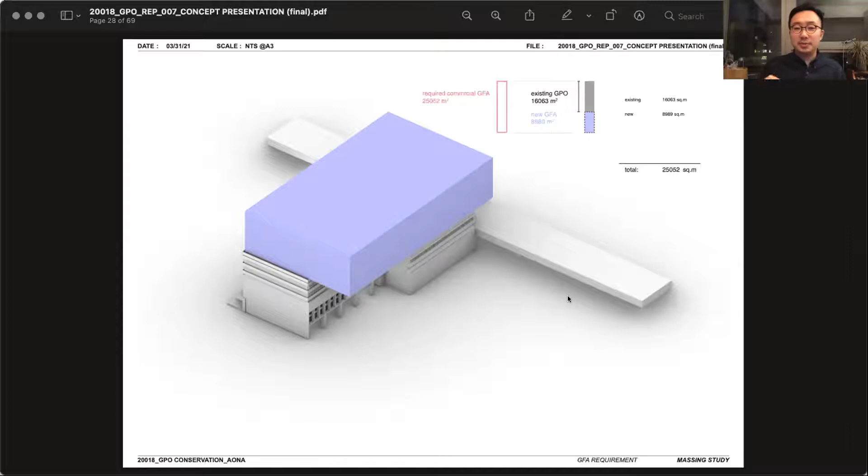So we looked at a lot of massing possibilities. And then one thing that we find out, which is quite interesting, is that the facade that we see, the outlook of the GPO today, especially when we look at it from the north side, that is not the original appearance of the GPO.

When the GPO was first built, it was built in front of Victoria Harbour. It has a promenade running across the whole length of the facade. It is not just a promenade, it is actually a three-story structure that houses exclusive docks to the interior of the GPO as well, so that boats carrying the mails can come into this structure, and then there are cranes that would take the mails and postages into the building itself.

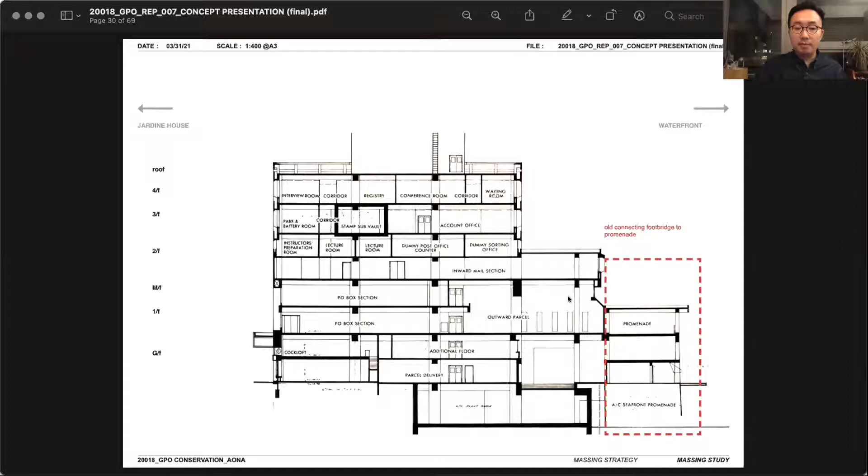But then the southern facade, when we look at the building from the southern side, more or less still keeps the same outlook.

What we have found out is that when we look at the GPO today, it doesn't have this kind of connection to the water anymore, obviously because of the reclamation. But it's also because of the fact that after the reclamation, the level difference between the sea level and the land is closed off. So what we are proposing is, what if we try to recreate that condition and propose almost like a new way of looking back to the northern facade of the GPO, but that new angle is obviously the old angle that you would see from the boats if you're on Victoria Harbour.

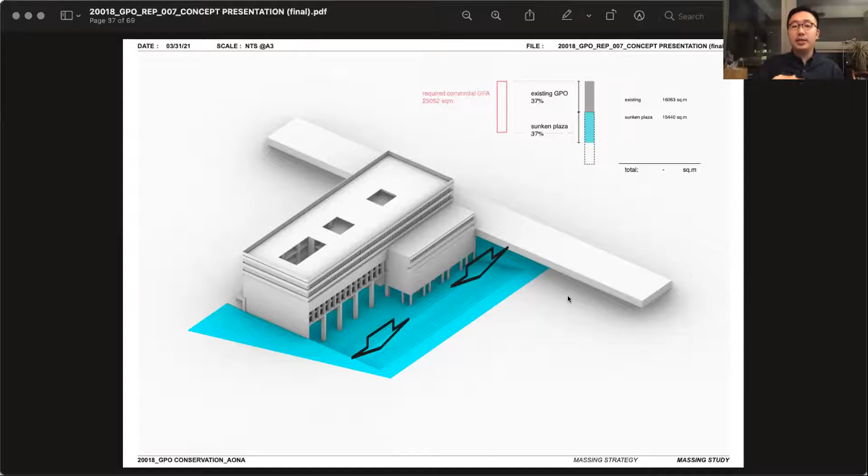So this is the first strategy that we want to propose. What if we lower the ground by 1 or 2 levels? First of all, we will gain a sunken plaza, and you will almost regain that lowered viewpoint that was on the sea level before the reclamation happened. But beside that, you will gain some GFA because of the underground structures as well.

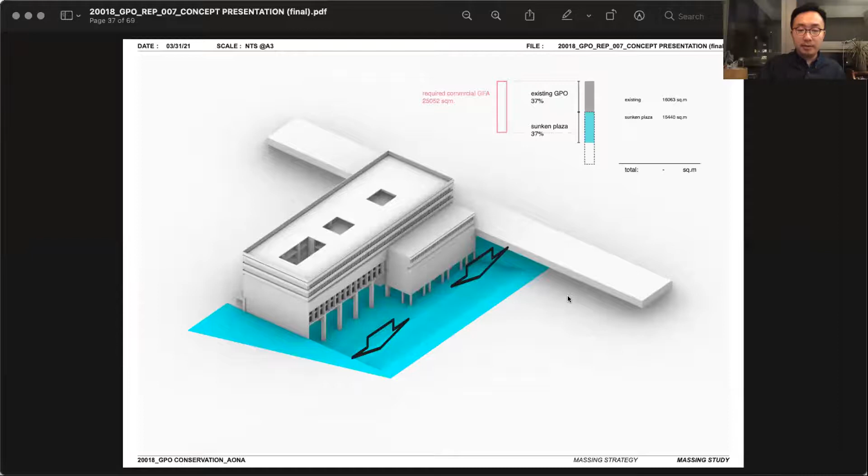And then we try to ask ourselves, what if we try to recreate that promenade structure as well, so that we can resolve those additional GFA that we might need to put onto the GPO.

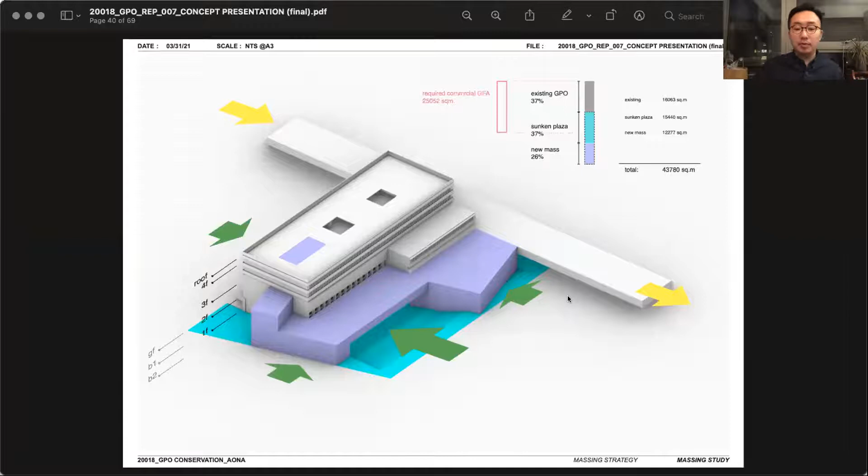By doing that, we will be able to create a lot more different access points into the interior spaces of the GPO. The current access point for the public is mainly from the southern side of the GPO. But in order for the interior space of the GPO to be open to the public, we want to propose more access points so that people can get into the building from multiple approaches.

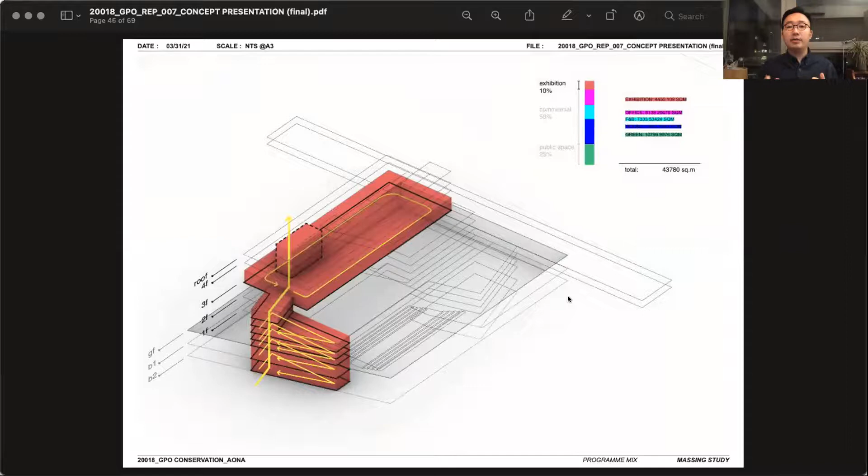So these are some of the programs that we're still drafting. But one of the main points I want to bring out is that there is a possibility of putting an exhibition space, almost like a postal museum, in one of the levels of the GPO. That is also the reason why we want to create multiple access points into the interior of the GPO, so that it could inhabit multiple programs.

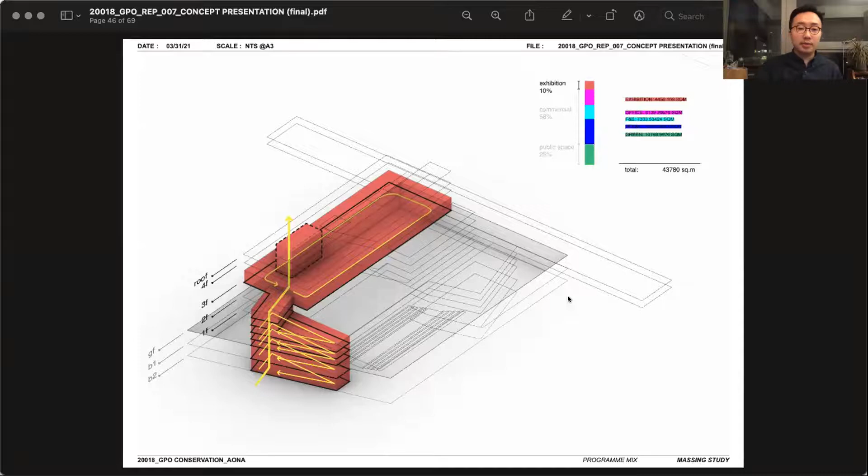And these are some of the very rough renderings that we have made, trying to simulate what would be the appearance of the GPO after we recreate this historical promenade structure.

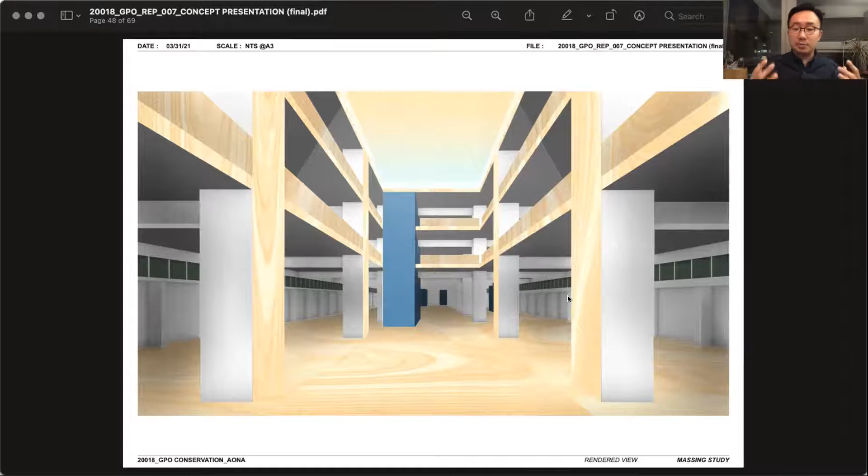And also what would happen if we open up the existing atriums that are already in the GPO now, meaning what if we turned the top few levels, which currently house the offices in the GPO, what if we open them up and turn it into some sort of exhibition postal museum spaces. This would be the public level of the GPO.

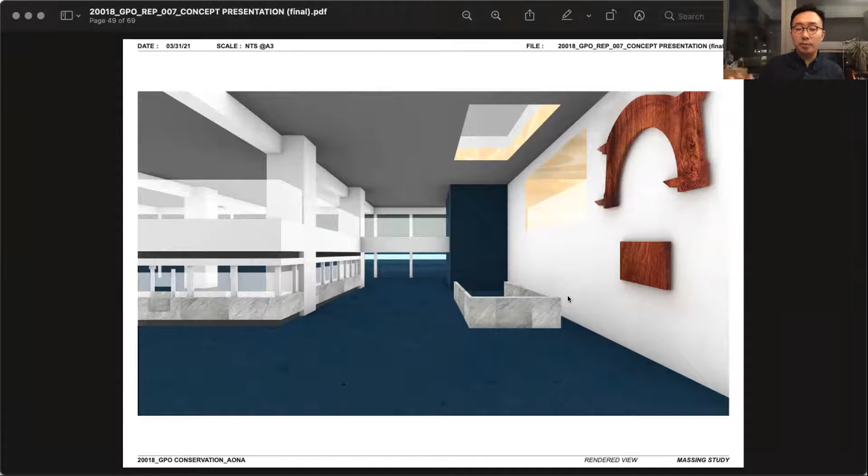Also, because of the connection with the new massings, the new portion, there could be some openings that could provide visual or pedestrian connections between the old building and the new portions and the new massing as well. So yes, this will be our presentation.

Hope that I'm not overrunning. I overrun.

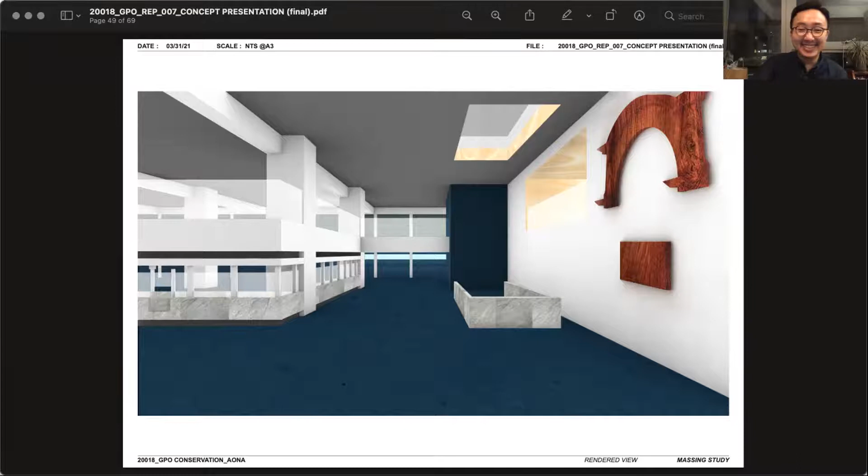Great, thank you so much, Charles, and thank you to each of these three teams who have taken on a different spin to the development of Site 3 and done it in a way that responds to public priorities and also promotes the idea that such a project should benefit the people of Hong Kong.

I think at the end of the day, the goal of this initiative is really to spark discussion about Site 3 and get people talking, right? To broaden the conversation from commercial or financial issues to also encompass the things that the public really cares about, whether it's things that the public and civic groups themselves have actually highlighted as important to them. So whether it's walkability, free to use spaces, or keeping the unique heritage feature of the GPO, these are things that civic groups and members of the public have themselves raised.

So I think we should clarify too that this is not a design competition. It's a conversation starter, a way for the public to register its interest and for anyone to share ideas, aspirations, and priorities. So to the folks in the audience, if your interest is piqued, I want to make clear that there's absolutely no need for you to have the same refined drawings that the firms have made. What's most important is that your concept or your story is made clear, because someone had asked, are students welcome to share ideas? And they most definitely are welcome to join this conversation.

Ultimately, I think it's important that in such a critical civic process, the public does have an opportunity to be heard, and that there is some transparency and openness. So by opening up this platform to the grassroots, all of us in this coalition really do hope it's an invitation to take part. And this coalition does believe we can have a community conversation about how to treat Site 3 and make it work for all Hong Kongers.